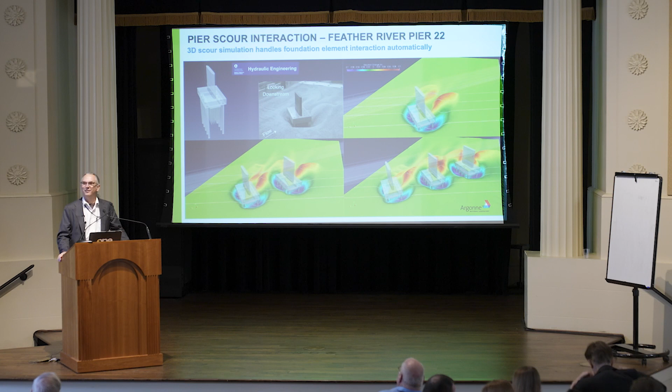Okay, everybody hear me okay? Yes, I have amplification. Okay, let's shift over to the other preview here. All right, I am being outsmarted. There it is. Come on up. There we are. And because this is not a PC, we're going to pick on poor old Macintosh.

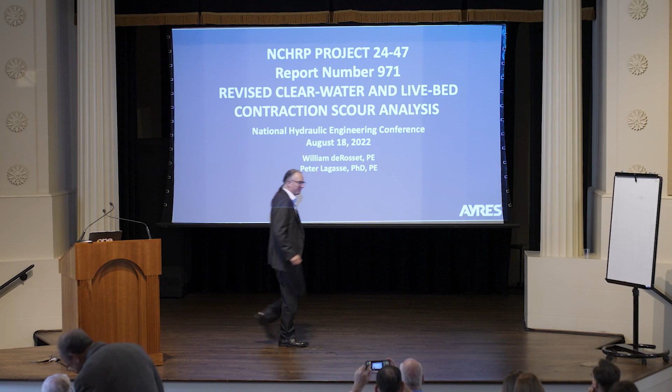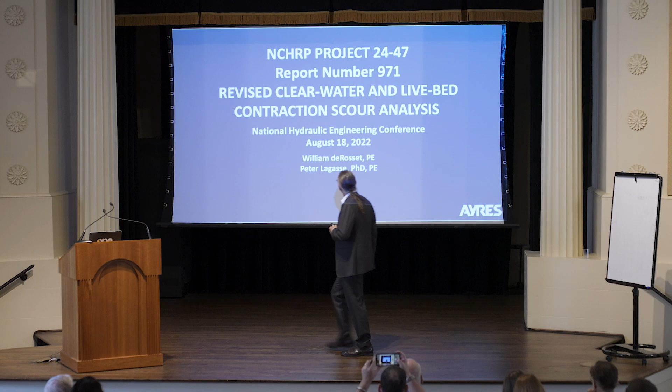There we are. Okay. So this is our final presentation on the NCHRP Project 24-47, NCHRP Report 971, where we looked at revised clear water and live bed contraction scour analysis.

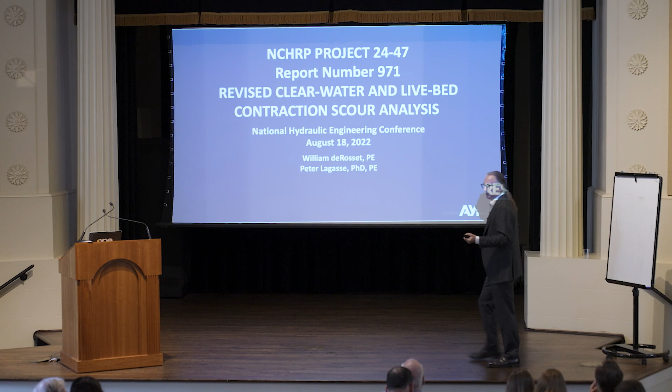Let me give you a little bit of background. This was occasioned by a prior NCHRP report, NCHRP Project 2434, when we looked at risk and reliability of the existing scour prediction technology. What we found was for pier scour, there were reasonably good data sets available. We could evaluate both the accuracy and the uncertainty associated with the pier scour equations, and similarly with the abutment scour equations.

We had relatively good data sets when we could evaluate the reliability of those - how variable your results are for a given prediction. When we reviewed contraction scour, what we found was the data sets were lacking. There were no accurate field data sets that would allow us to evaluate the reliability of that. Also, the abutment scour and pier scour relationships were design equations, so they had a certain amount of conservatism baked into them, and we were able to quantify that - the bias of the equations.

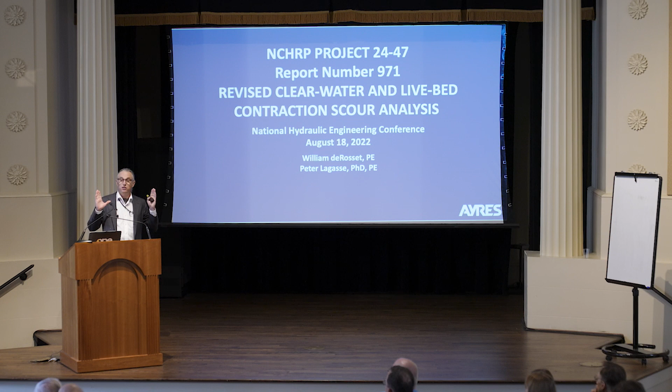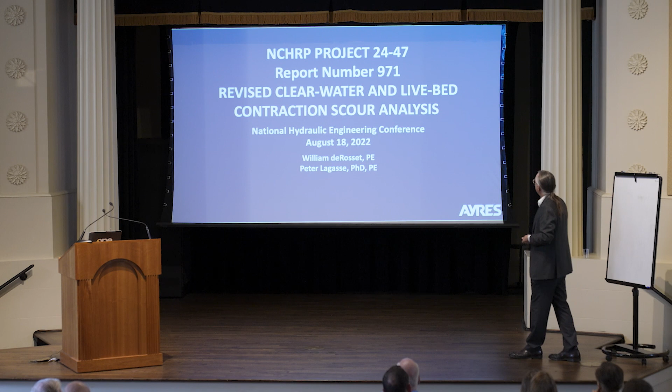However, with contraction scour, the existing technology is based on flow and sediment continuity, and was fundamentally derived from first principles. Those are true prediction equations, and they have no conservative bias built into them. Because there is a fair range of uncertainty - unknown but large - associated with the contraction scour equations, we wanted to investigate that further. NCHRP agreed with the engineering community, and we ended up putting together this NCHRP project.

The research team included my colleague Peter Lagasse, who was our principal investigator, and Dr. Rob Ettema, who was the co-PI. His team performed all of the flume evaluations, and we had a couple of excellent graduate students helping us out: myself, Mr. Scott Zai, formerly of Ayres, now living his passion project at the U.S. Forest Service; Mr. Paul Klopper, who was with us and retired, went through the revolving door, and now works with Catalina Civil; Ali Narayanpur, who was a PhD candidate and has since graduated and moved into industry, along with Ali Fakhri. We had a double Ali team. Narayanpur did the primary work on the sediment transport and looking at the contraction scour relationships, and Mr. Fakhri developed the vena contracta data that we use to modify those equations, as you'll see.

The project schedule: this was performed between 2016 and 2020, which is why we presented a preliminary version of this at NHEC 2020. This is our final stab at this. The document, NCHRP Report 971, which documents this effort, was published in November.

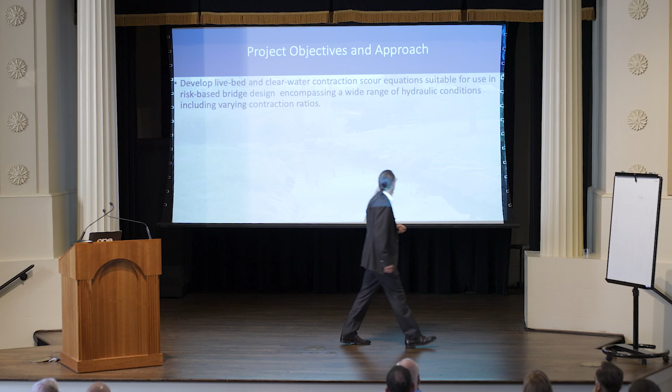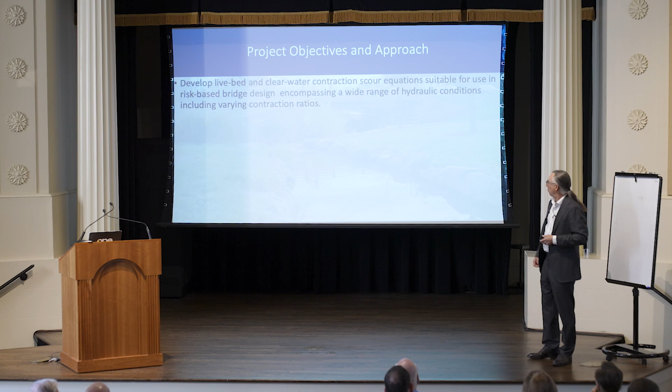So now, what were we trying to do? We wanted to develop live bed and clear water contraction scour equations that are suitable for risk-based design. We wanted to be able to quantify the bias and uncertainty of these and set them in such a way that they would be reasonable for design purposes. We wanted to encompass a wide range of hydraulic conditions, including varying contraction ratios. As you'll see when we talk about what we would like to do in the future, we also wanted to look at different entrance conditions, so different abutment shapes, and also move away from the long contraction concept to a short contraction - we'll talk about that in a minute.

We used a single non-cohesive sediment size in the interest of, frankly, resources. We did not have the resources to do a variety of sediment sizes. So we used the 8-foot laboratory flume at Colorado State University.

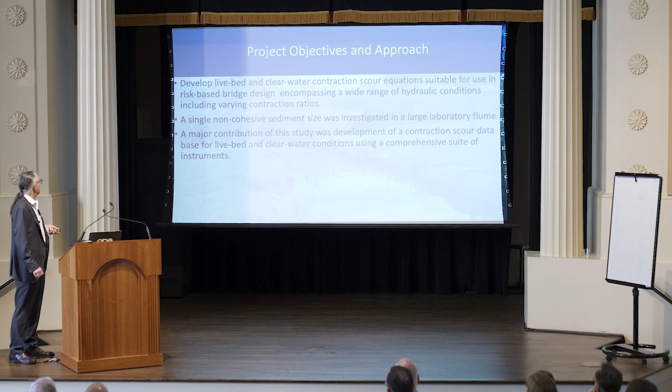So we developed a contraction scour data set. We have 19 well-developed simulations, and we will talk about that in a little bit. I see that as a major contribution because it was well instrumented and well documented, and those data sets are available to do extensions of the research that got started here.

So a couple of things we needed to do. We had to do a literature review and fundamental hydraulic analysis. What are the variables involved? What do we want to vary to see what's going on? And look at the existing contraction scour data. How does that perform? Where are the gaps? What gaps do we need to fill?

Develop and execute the laboratory test plan. Apply computational techniques. This was very limited in this research, but is a wonderful avenue for further study. Develop enhanced clear water and live bed contraction scour equations.

So we looked at the equations. We saw an opportunity to improve them, or capture more of the physics of the system into a relatively easy to apply equation. And then finally, we developed both a NCHRP report and a training manual for application of these. And then we got to submit the report, review it, and get it published.

So this is just a review of the hydraulics of a short contraction. Most bridges are short, hydraulically short contractions. As you can see, we have flow moving in here. We have an uncontracted width, and we have a contraction, a relatively short contraction.

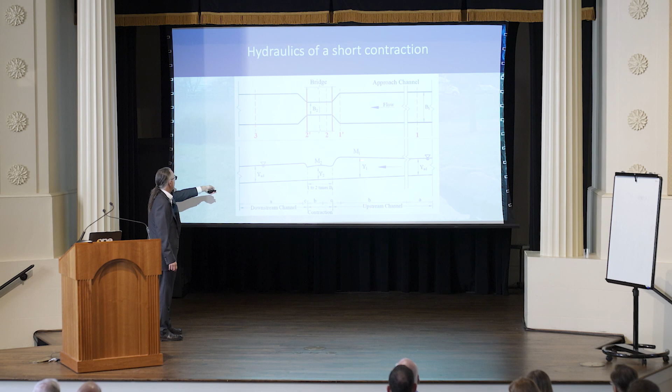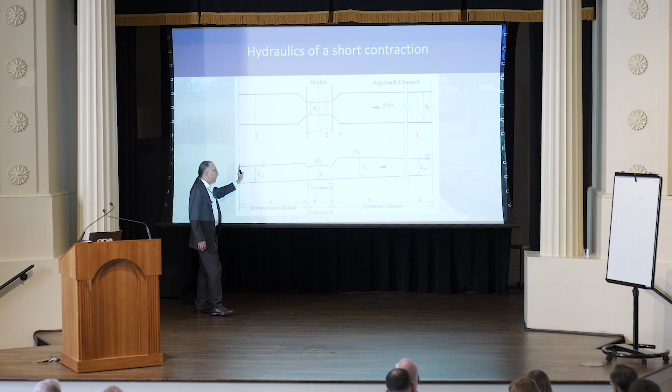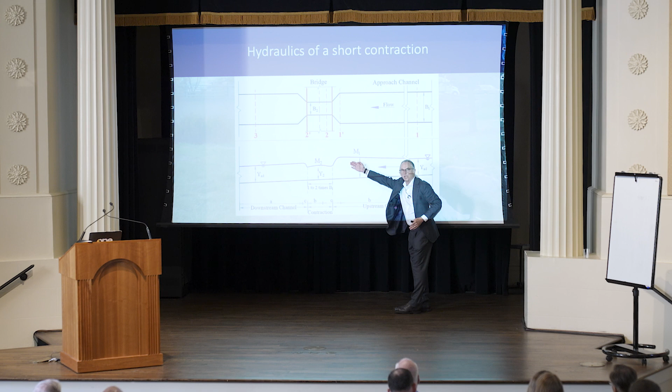And we can look at the flow profiles as we move through this along the center line. You'll notice that in the laboratory environment, we started off with a normal depth, starting water surface elevation, so we did not see a whole lot of variability until we got into our contracted section. Then as we move upstream, we have backwater associated with the bridge, and eventually, if this went far enough, we would have a theoretical upstream normal depth as well.

Some of the research that did not pan out so well was actually looking in detail at this theoretical upstream normal depth.

So we did do, for flow visualization, we wanted to see what the contraction patterns are like in our opening here. If we look at the throat of that bridge opening as we move into the contracted section, there's a lot of things going on here.

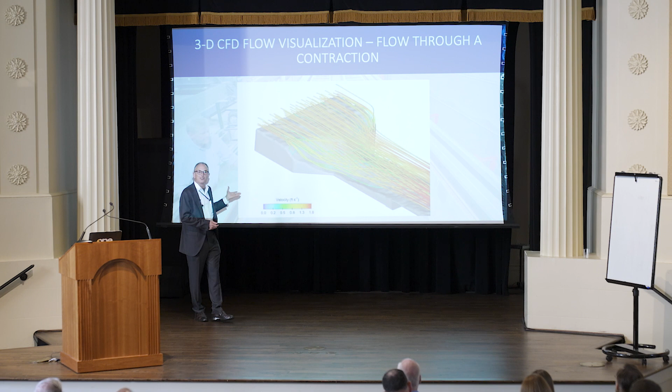Now, I don't have moving graphics. There are no robots involved, so this will all be quite static. But you can see that the flow, as we move around that obstruction, we have turbulent structures forming, and as we saw in our excellent prior presentation, Dr. Lai showed those turbulent structures forming at the corner of our opening.

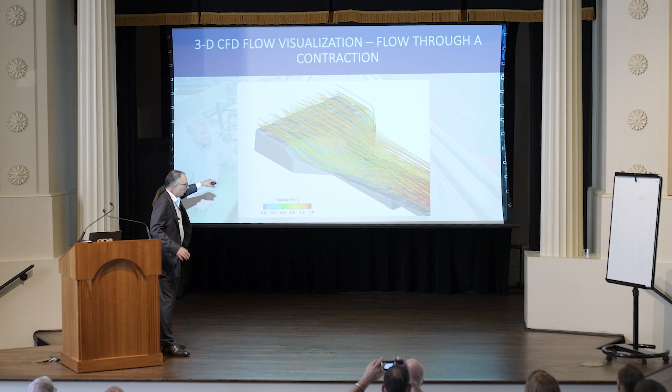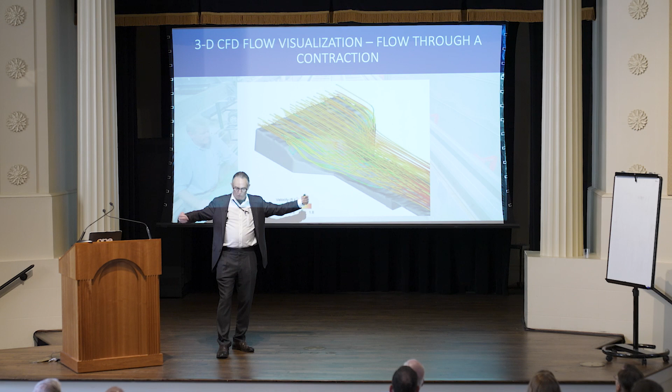Here we have a more gradual opening as opposed to that sharp vertical wall, but we still have turbulent structures forming there, and in addition to the flow contraction, those are all interacting simultaneously. If we have enough constriction, those two turbulent structures that form as we force water around the abutments will actually interact in the main channel.

That is not what we are studying. Those are local scour phenomena. We're still fundamentally looking at that sediment continuity through the bridge opening.

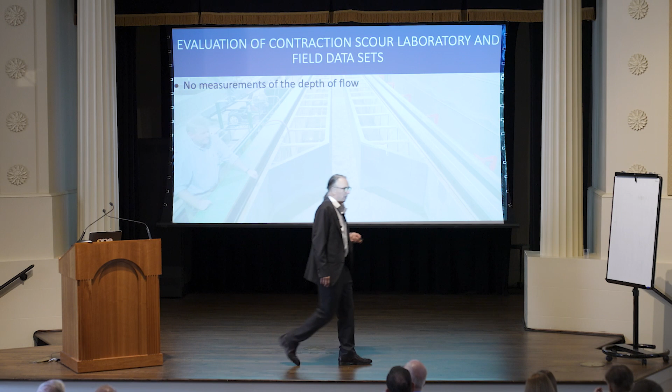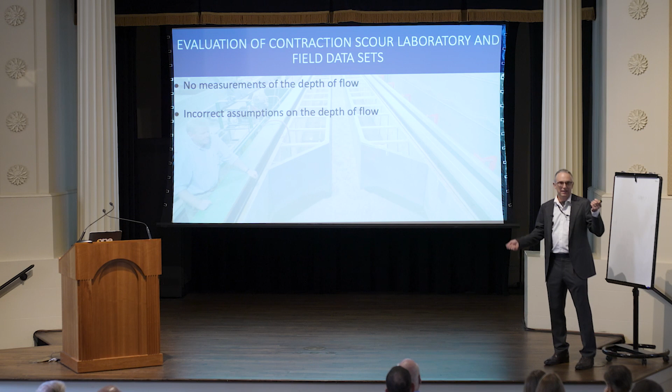So we had flow, let's see here. Traditionally, we had no good measurements of depth of flow, and incorrect assumptions on the depths of flow, so we either did not get good information or the researchers were making poor assumptions about what those depths of flow were.

Most studies were done under clear water conditions. This study was performed under both clear water and live bed with sediment supply conditions. And the field data sets were just flat not usable. So that was the existing state of practice.

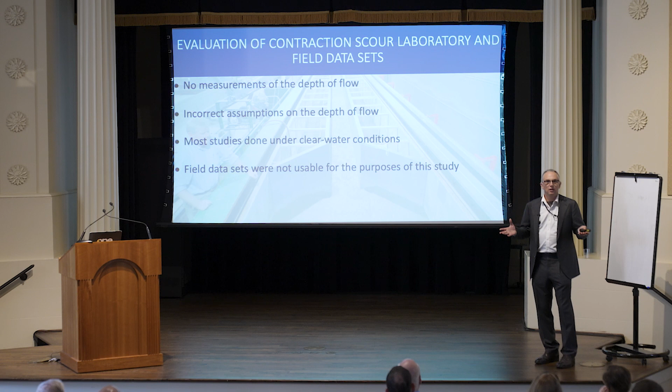So we wanted to adapt that. This is one of the better studies that we had as part of our literature search. Check my time, I'll talk endlessly on this if you let me.

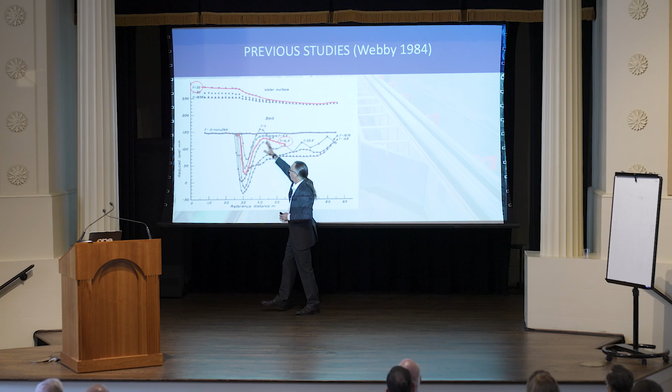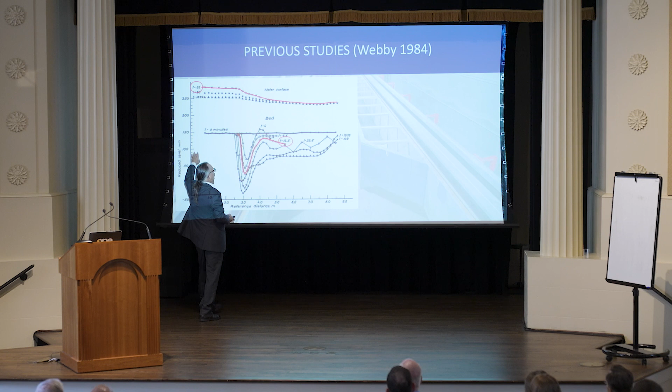So here we have a water surface. You'll notice they already started 22 minutes in. It takes a little while to rev up your flume and start taking measurements. If you're working in a sand or gravel bed environment, you're already going to be moving that sediment in the contracted region. So by the time you get to that 22 minutes or so, you've already developed a pretty well-established scour hole. You can see it's evolving through time here.

You'll also notice that the distance here, this is about a 30-foot flume. So what, by the way, what was the flow depth before scour?

We don't know. One of the things about the state of practice, the way we apply contraction scour today—what do we apply at our contracted section when we evaluate scour using the HEC-18 equation? We're looking at the pre-scour flow depth in that location. So if we want an equation that would improve on that, we would want to make sure that when we evaluate the scour depth based on that pre-scour flow depth, we're getting accurate estimates. And we just don't know.

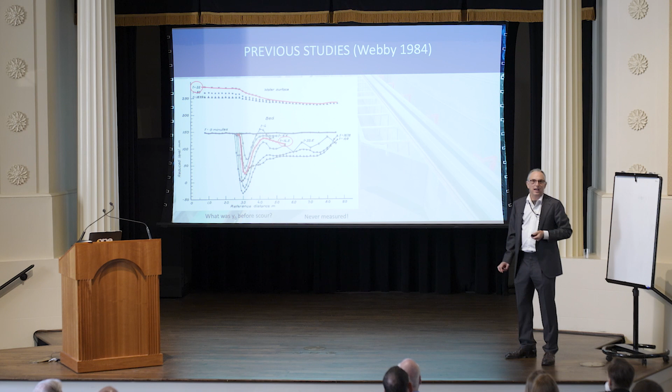Our current scour technology compares depths, fundamentally. We have a pre-scour depth and a post-scour depth, or rather an upstream flow depth at equilibrium and a contracted scour depth at equilibrium. That is the data that we have from our existing studies.

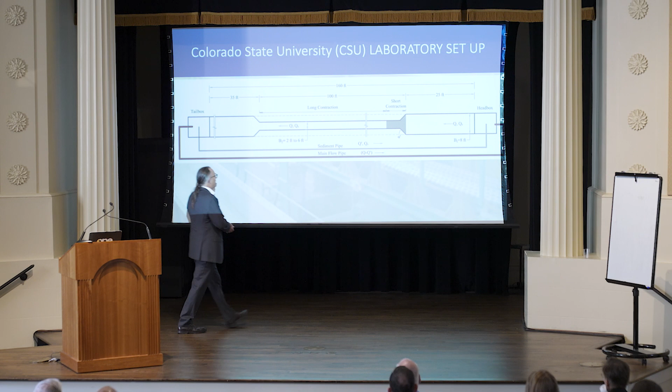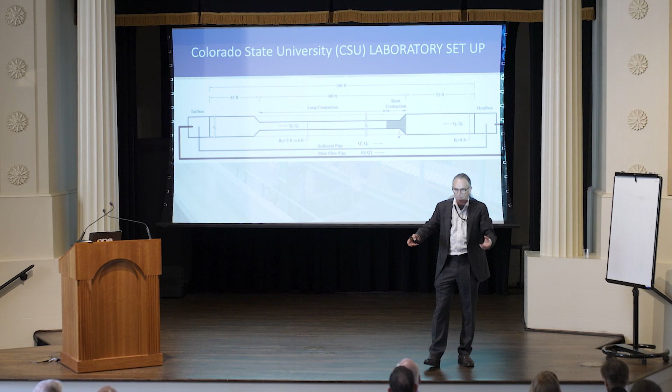So to remedy that, this was the lab setup. This is a 160-foot long flume. The area of maximum interest is actually in this short contraction reach, where we had all of those flow field features—the turbulent structures formed at the corner of the abutments, and what we describe as a vena contracta—interacting.

That's our area of maximum interest. And then we extended the flume well downstream. So there's the 8-foot flume before we installed, or rather before CSU installed, the experiments.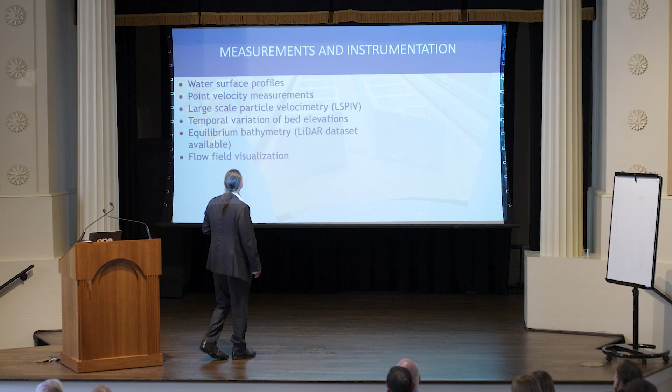As part of the measurement and instrumentation, they took water surface profiles as a function of time. They were also looking at point velocity measurements. They also did large-scale particle velocimetry, so they were dropping lots of confetti in the water and getting video capture of that as they looked at the surface. And then the time variation of the bed elevation along 3 transects in the water column.

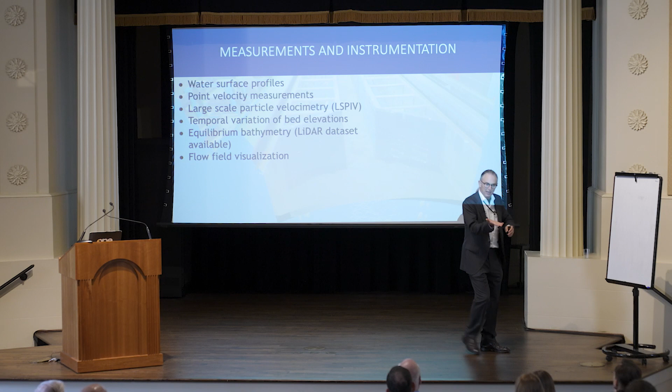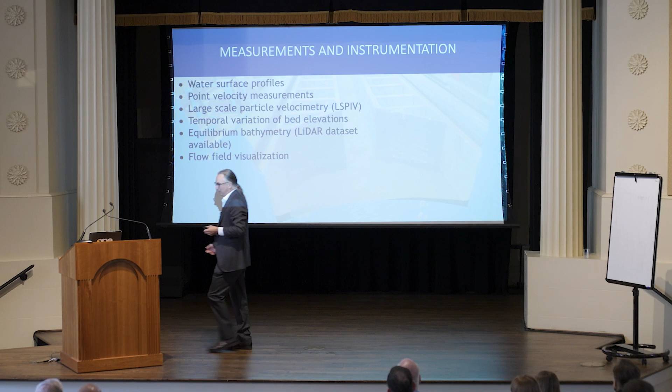Also, one thing that is easier—you saw yesterday Cornell presented his ESTD, and there they were actually doing real-time laser scanning, which is really easy to do in clear water, much harder in a live bed environment. So here they were actually taking point measurements along those. So we got equilibrium bathymetry.

So once the lab team determined that they had reached equilibrium, or something approaching equilibrium, they actually drained the flume and took a LiDAR data set of each one of their simulations. And then finally, we did some flow field visualization.

So we looked at 3 different contraction ratios: 4-to-1 contraction, so 25% opening; moderate, 50%, so 2-to-1 contraction; and then mild, 3/4 to 1, so 4/3 to 1 contraction. We originally were planning to look at multiple transitions, and the world is a finite place, so we ended up doing wing walls, so 45-degree transitions.

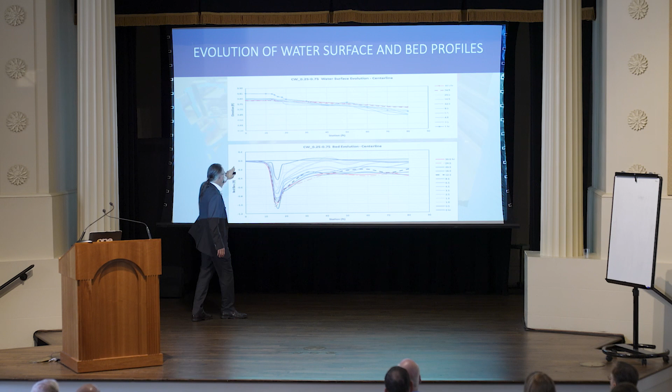So now we can look at the time evolution of our water surface and bed profiles. And you can see through time, backwater decreases, the bed evolution changes through time here, and we reach an equilibrium scour depth. Now you notice this is varying through time—those are those bed forms that are forming in that full long contraction.

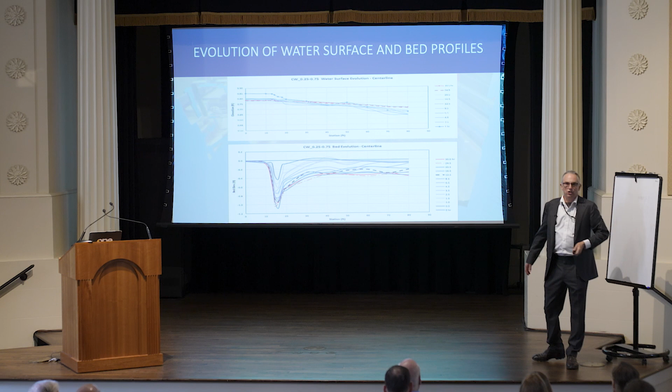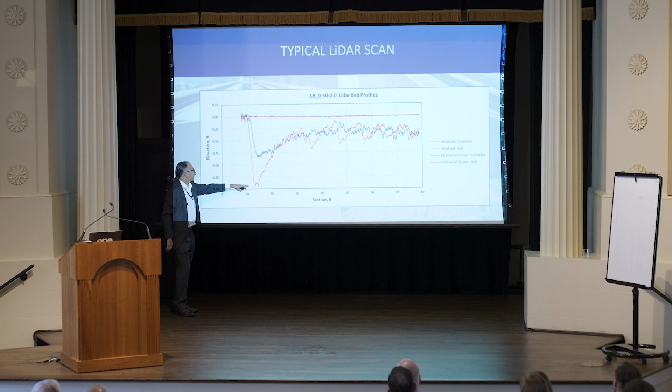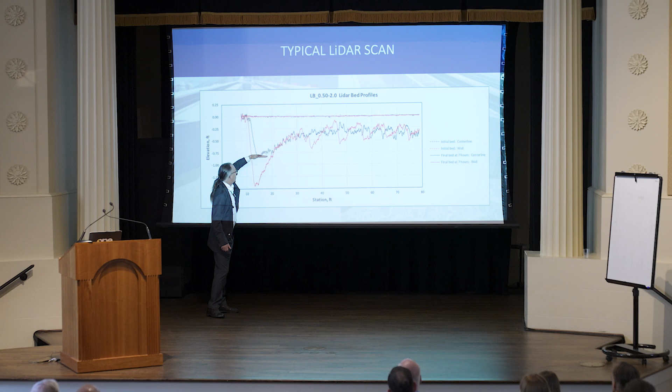So typical LiDAR scan—you notice it's pretty noisy, and this was common. So here we just took a profile along the center line and also the wall, 7-hour simulation in this particular case. We see that we got about a foot and change of scour along the wall, rather less along the center line. Again, that is that local scour contribution, which we did not want to account for, because we use other methods to account for this amplification using the NCHRP 24-20 method, the amplification from this contraction scour depth down to the local scour depth.

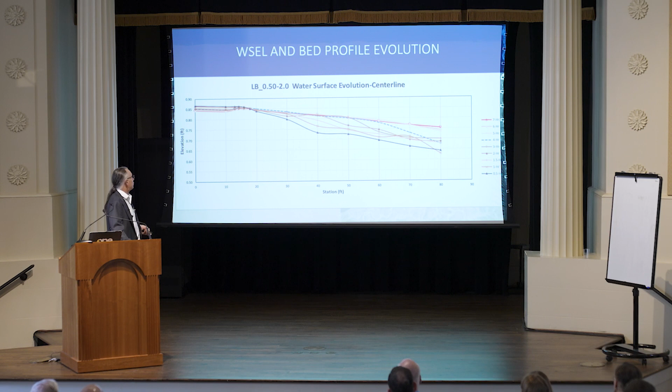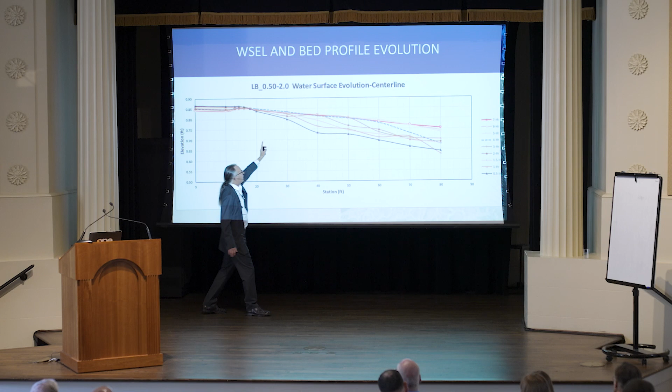So, water surface changes through time, and you can see that it doesn't change that much in the throat of our section, but you can see significant variation in the downstream water surface as that bed evolved and degraded into its equilibrium condition.

Similarly, for this live bed example, it was actually a lot harder to catch—to subtract out the influence of bed forms in the throat, and particularly downstream. So we had to account for that.

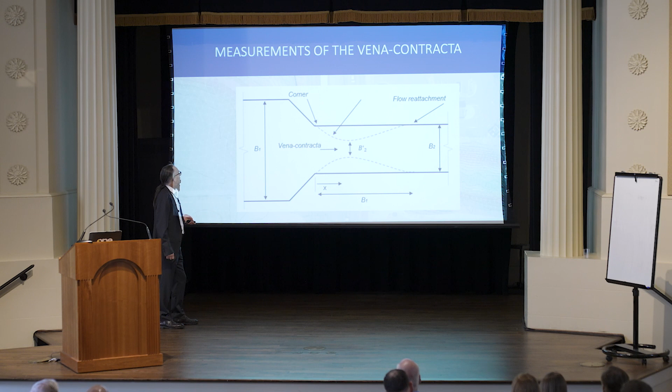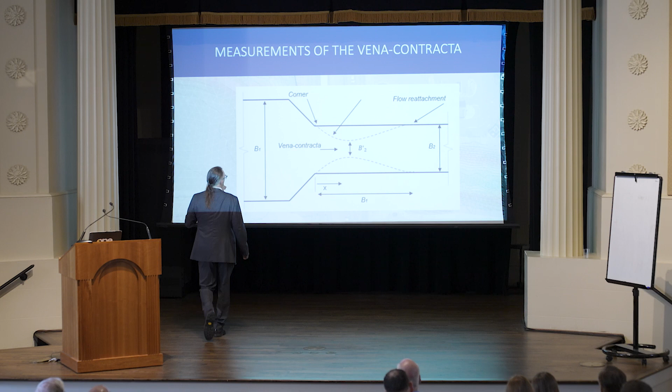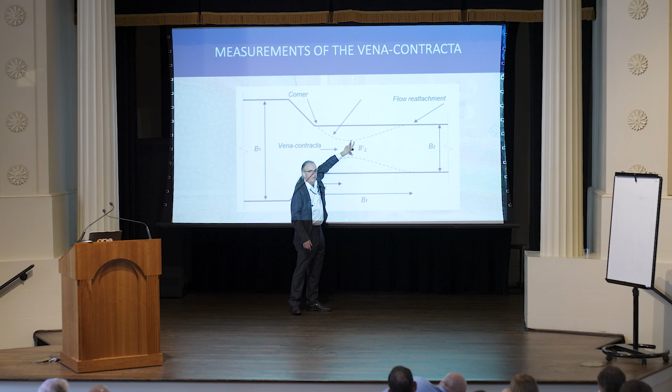One thing that we observed, and this was very much helped by the LSPIV data that we got—that particle image velocimetry—was that there was an additional contraction. So when we looked at the contraction, rather than this geometric width, the actual effective flow width was relatively narrower. And this varied with the unit discharge ratio, and then also, as we see, with the flow intensity or Froude number.

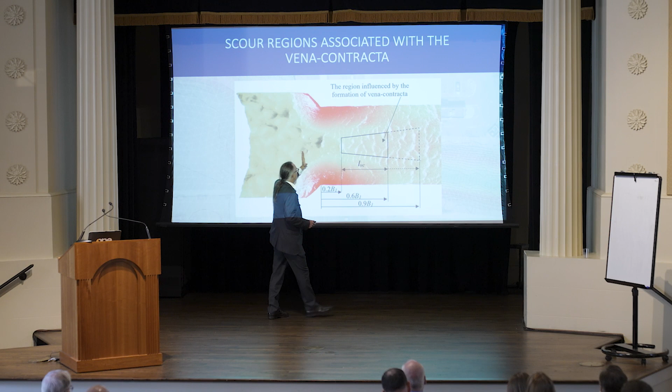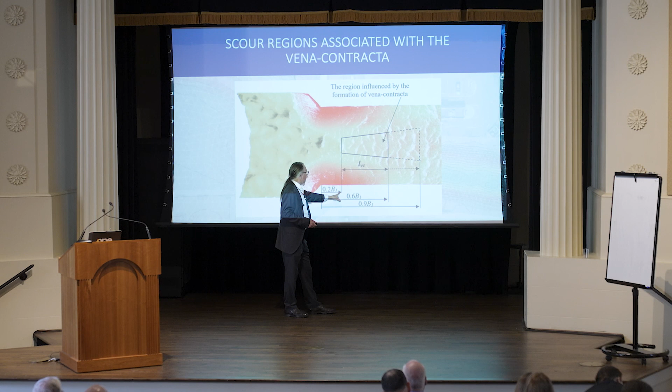So now we look at this, and we wanted to evaluate where was the point of maximum contraction scour. We had to decide—we don't want to include the region that's highly influenced by local scour. We want to subtract out or average out the bed forms, because those are going to be time-varying features. And then finally, there was a region in which we consistently found, or the CSU team consistently found, a point of maximum contraction. That was in this bridge opening, and it varied from 0.2 to about 0.6. If we grabbed more than this, we saw more results variability, less certainty, and if we grabbed less than that, we weren't necessarily capturing the region associated with that point of maximum scour.

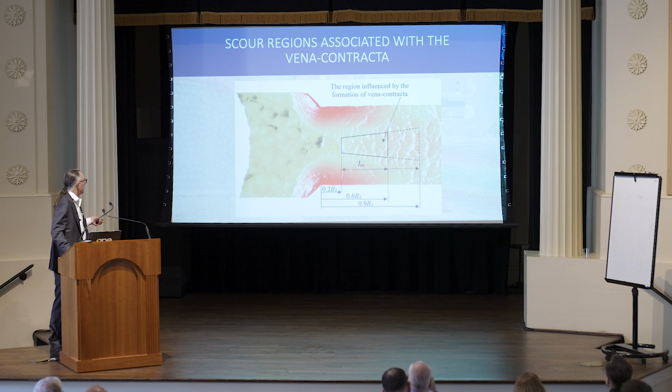So with that, we were able to evaluate, well, we know what B2 is, so we know what this contracted width is, W2, in the HEC 18 formulation. That's easy to come up with. But this additional contraction associated with the vena contracta, we didn't have such good data for that.

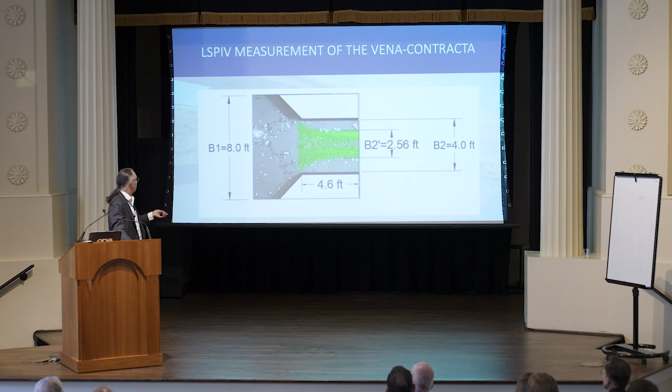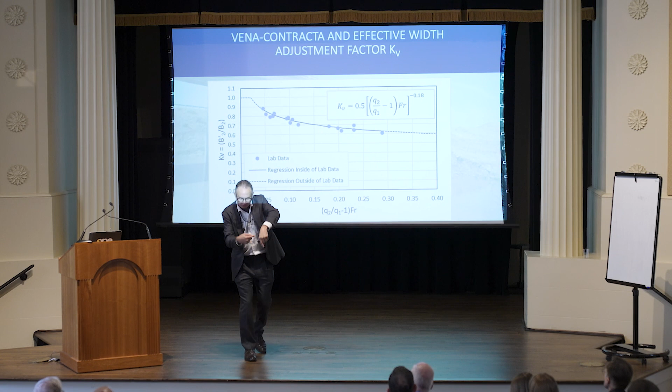And it had a significant effect on our scour results. So we took the lab data and took out the data for the very extreme constrictions where the local scour turbulent structures interacted with that center point, that vena contracta. And so we subtracted those off. We took the remaining lab data and drew a line through it.

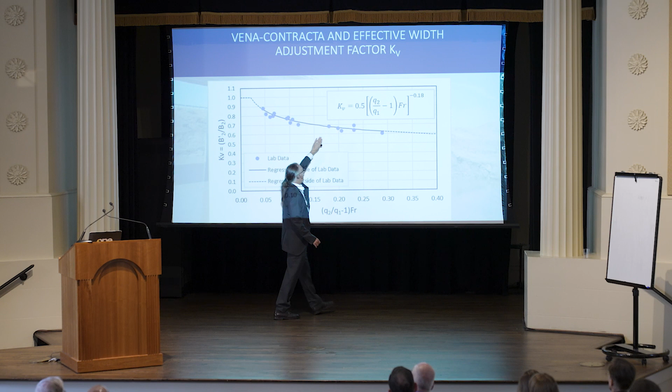And this line is very slightly different than what Mr. Fakhri developed for his work. It's non-dimensional, and so we developed a K sub V. So this is the width ratio associated with that vena contracta versus the geometric width. And the 0.5 and the minus 0.18 are empirical results from our regression, but the rest was dimensional analysis and working through this data.

So now the result, how we applied this was to use that K sub V factor, which remember is equal to or less than 1, to increase the scour depth. For the HEC 18 equations, you can see that we have the unit discharge squared, the unit correction factor, d sub m, and all this to the 3/7, but we include that K sub V in the unit discharge to account for that additional constriction or contraction.

Similarly for the live bed equation, you have your discharge ratio, you have your width ratio, and that shows up in the W2. In general, this will increase your scour.

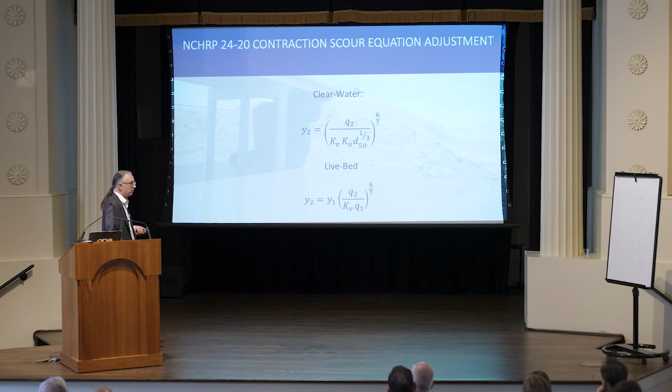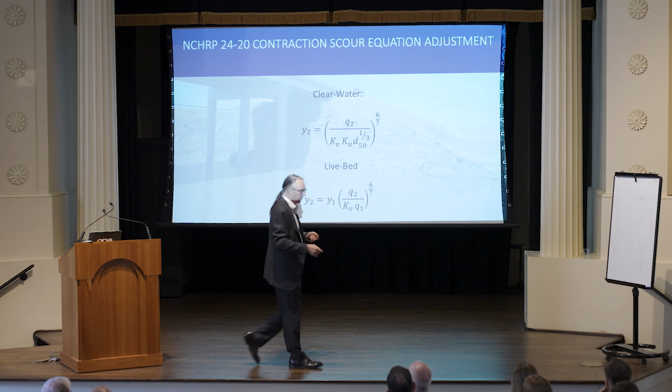Similarly, we also evaluated the NCHRP 24-20 simplified contraction scour equations that it uses to evaluate abutment scour. Recall that with that method we have a contraction, and then we use an empirically determined amplification factor to account for the presence and influence of those local vortices. So this is a simplified version.

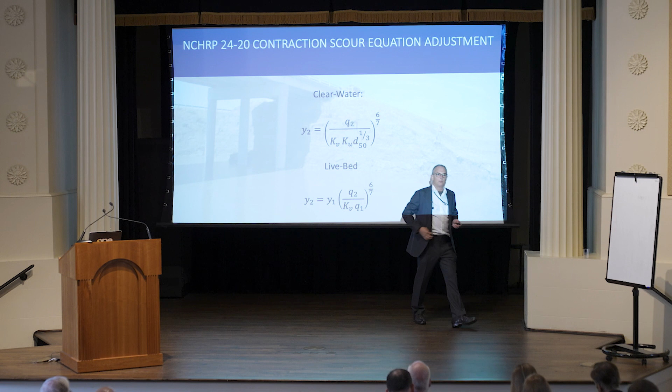So Y2 for HEC 18, we simplify that a bit. You'll notice that they rearranged it a bit. This is geometrically or algebraically identical, except that they have adjusted d sub m to d50. This is a slightly conservative simplification.

Similarly, for the live bed equation, unit discharge ratio to the 6/7 and K sub V. This will tend to increase our scour a bit. All that does is assume that this bed condition factor is equal to 6/7.

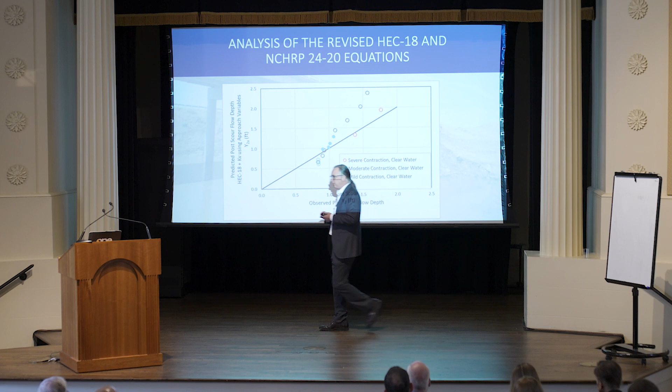So with that, when we looked at applying HEC 18 and the NCHRP 2420 method with these, it does tend to increase scour. And prior to doing this, notice that we are regressing Y2 versus Y2A. So we're looking at the post-scour flow depth, and I'll talk about why in a second.

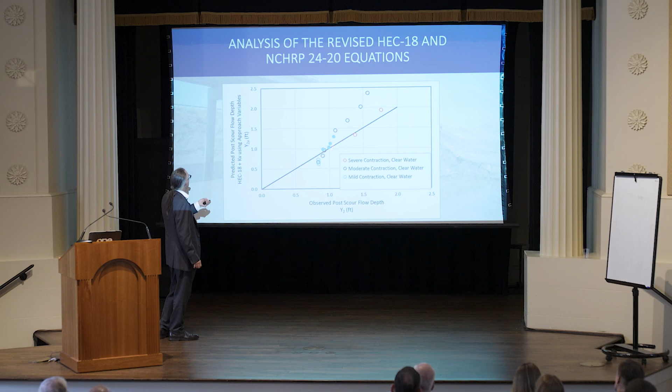But we do get, it does increase the relative conservatism of the equation, which decreases the bias, which increases your effective factor of safety. It also increased your reliability factor, beta.

So similarly for the NCHRP 2420 method, it is a slightly more conservative equation, so we are over-predicting, but that is desirable if we want to have some degree of confidence, some reliability built into our equations.

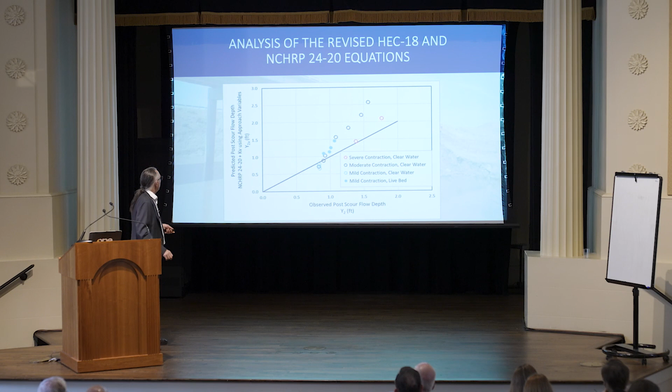Now, we just applied K sub V linearly, and what you'll notice is, I'm not sure that's necessarily the ideal fit here, but that would be something we could apply once we extend the data set and get more information, more data points here.

So now, let's go to our conclusions here. So for NCHRP 2434, when we looked at reasonable reliability factors, remember that a reliability factor is just how far away from your mean or your actual predicted value the actual value is likely to be. So how many standard deviations do you want to be conservative?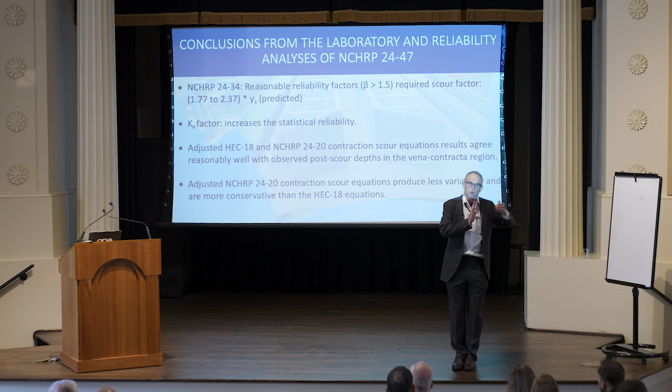Do you want it to be a prediction equation that half the time underpredicts and half the time overpredicts? Or for design, do you want to make sure that you are overpredicting, but have some confidence that you are going to have a reasonable estimate? So what we found from NCHRP 2434 is that for reliability factors greater than 1.5, we needed scour factors where we linearly increase the scour depth between 1 and 1.77 to 2.4.

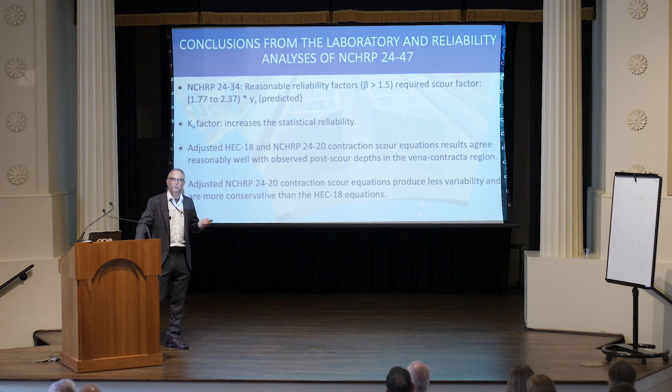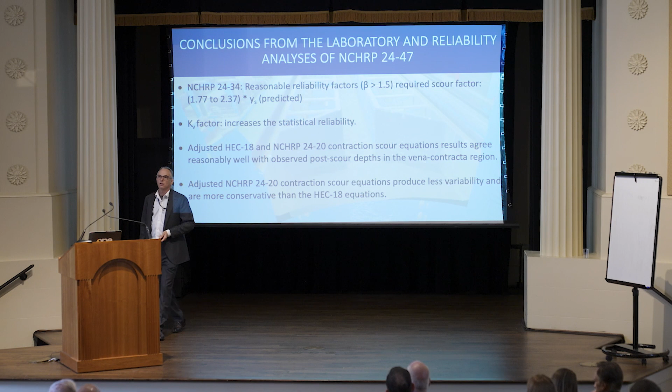However, with K sub V, we can increase that statistical reliability. We can also reduce the variability. The adjusted HEC 18 and NCHRP 2420 equations agreed reasonably well, though there's additional work to be done to refine that. The adjusted NCHRP 2420 contraction scour equation actually outperformed the HEC 18 equation for this data set, with less variability and more conservative results.

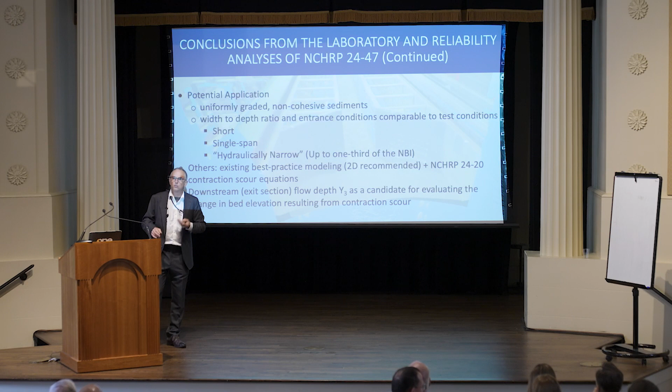So now, potential applications for this. Remember, this is just 19 data points, so we don't want to apply this willy-nilly. The potential application here is for uniformly graded, non-cohesive sediments. We didn't account for sand and gravel together, and didn't look at cohesive soils. So width to depth ratios and entrance conditions comparable to the model studies, which would be a relatively short, single span structure. For typical floodplain widths, we're looking at things less than 40 feet in length, and those are very commonly going to be hydraulically narrow.

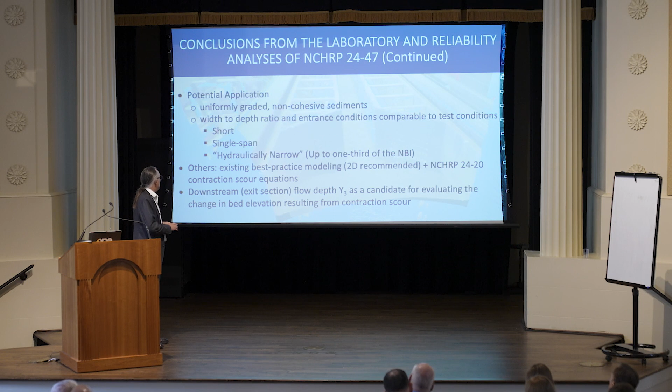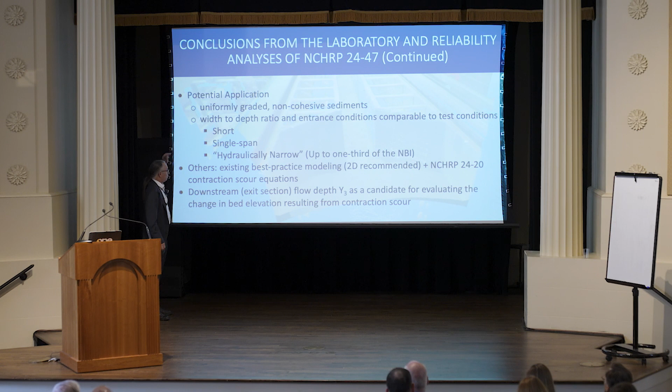Now, this does have potential applicability to up to about a third of the bridges in the NBI as of 2020, so about 200,000 bridges. For other bridges, we would not recommend using this K sub V factor because we just don't have the data for it. So we want to use existing best practice modeling practices, and based on the results review, we would actually recommend the NCHRP 2420 simplified scour equations.

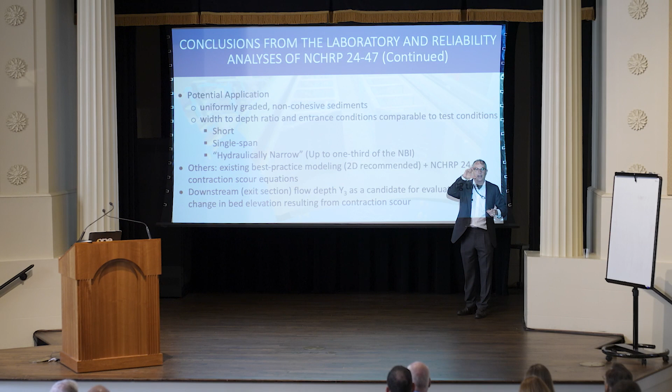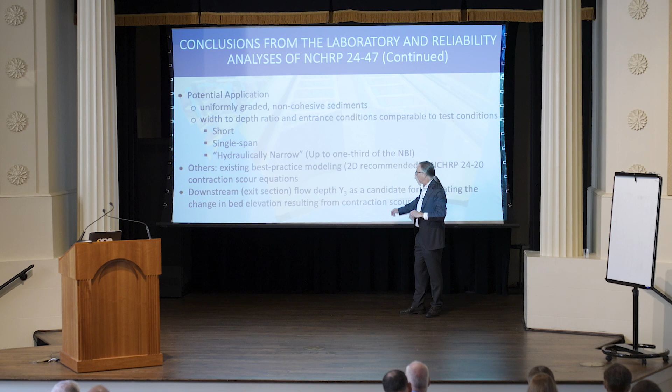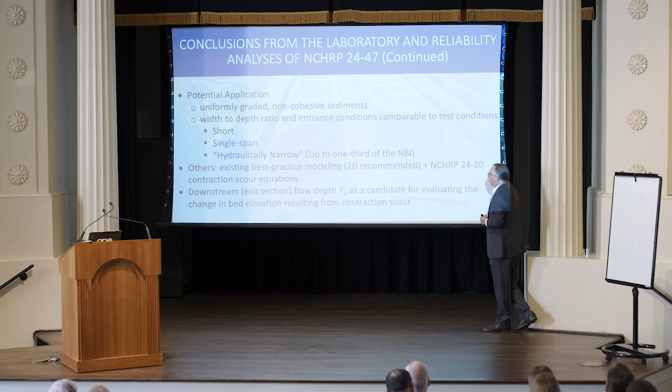One other thing we noticed—I talked about flow depths a lot and rather less about the net scour. That's because there's a datum issue with using that pre-scour flow depth; it decouples from the actual results of your prediction. One thing we found is if you use the downstream flow depth, which we called Y3 in the report, it might be a more reasonable candidate for evaluating the change in bed elevation from contraction scour rather than just these flow depths.

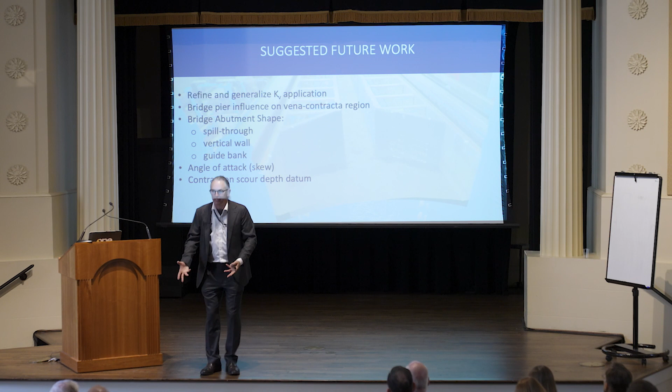So future work: refine and generalize the K sub V application, and in particular look at bridge pier influences, bridge skew, and that entrance condition. If we have spill-through abutments, they are very likely to have different characteristics for that K sub V. And finally, additional studies probably would be valuable, at least until we get into the next scour realm, where we're performing mobile bed hydraulics and directly calculating this, capturing the full physics, or as much of the physics as we need to. While we're still using these prediction equations, we want to take a look at that contraction scour depth datum.

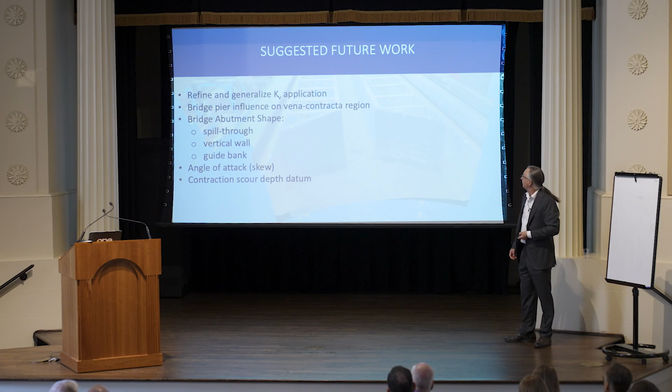And with that, what questions do you have? Or do we have time for questions? One or two questions. Okay, yes. And I was in artillery for 4 years, so please speak up.

So you mentioned adjusting the NCHRP 2420 using the new contraction equations. My question is that traditionally when you do a scour analysis, there are equations in HEC 18 for each overbank versus the main channel contraction scour. And then you have the NCHRP, which is another contraction scour equation that applies to these same areas plus the abutment. The problem is that the criteria for deciding between live bed versus clear water contraction scour between the two sets of equations are different. So you may end up with the clear water contraction scour calculated for each overbank and your main channel, versus then when you move on to calculating the NCHRP 2420 abutment contraction scour, you may end up with the live bed contraction scour. And we've had, believe me, situations where we calculated contraction scour for the left overbank that was 15 feet, and then NCHRP 2420 gave us contraction scour of 10 feet at the abutment. And our client is asking, how could the left overbank contraction scour be 15 feet, but the abutment be less than that? So the question then is, are you able to overcome this double standard that exists in today's HEC 18 procedure application?